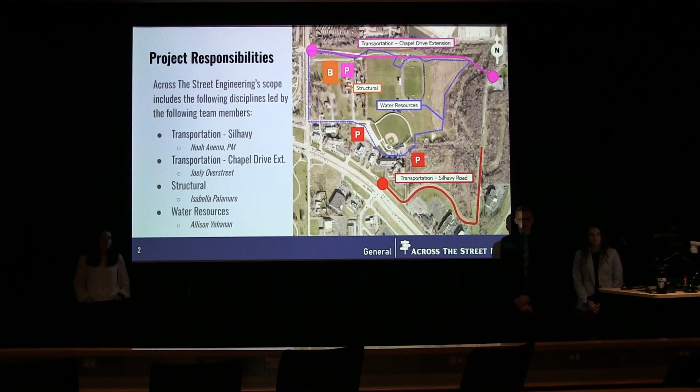During this presentation, we'll each take a turn to present the alternatives that we have looked at this semester, and we'll also present which ones we have selected. I'll kick things off by looking at transportation at Silhavy Road.

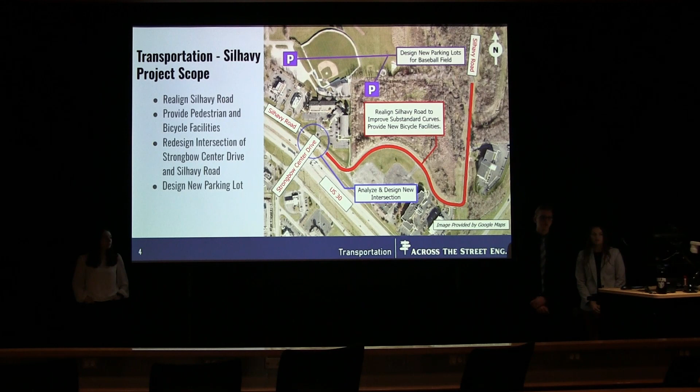As a recap from last presentation, I will be realigning Silhavy Road to improve substandard curves that currently exist. Along this alignment, I've been asked to provide facilities for pedestrian and bike travel. The city has also asked our team to redesign the intersection of Strongbow Center Drive and Silhavy Road. Finally, new and improved parking is needed for the VU baseball facilities.

The benefit of this alternative is it is the lowest cost both for construction and maintenance. It also has a very good level of service and low intersection delay. The disadvantage of this alternative is there are some safety concerns for pedestrians, especially crossing the northbound and southbound road.

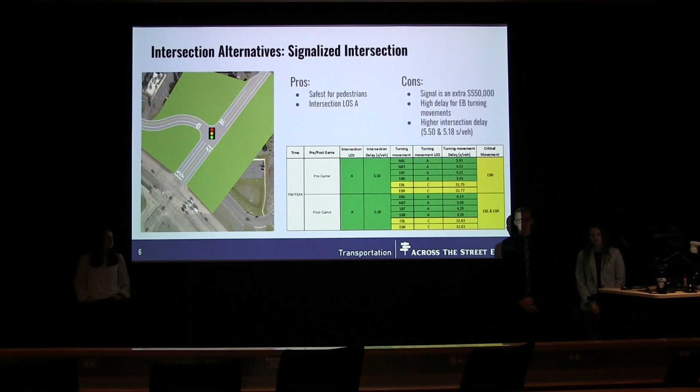The second alternative is a signalized intersection. This intersection will be safer for pedestrians, as a pedestrian phase can be included in the signal timing. It also has a good level of service, an A again. The disadvantage of the signal is it's an extra $550,000 approximately, and it does have a high delay for eastbound turning movements. While it does have a low intersection delay, it is higher than the other two alternatives.

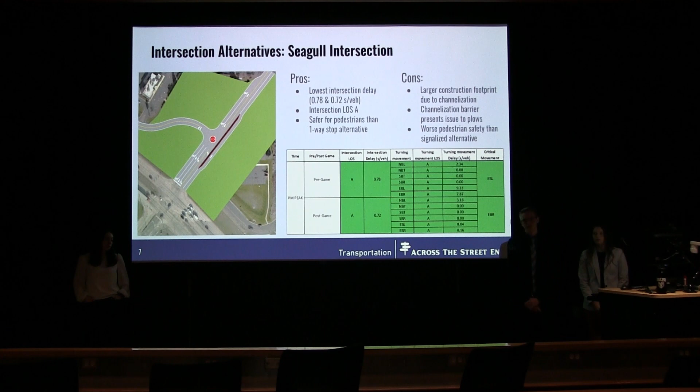The third alternative is a Seagull intersection. This intersection has the lowest intersection delay of all three alternatives. It is also safer for pedestrians than a one-way stop, since a pedestrian refuge can be constructed within the channelization barrier. The disadvantage of the barrier is that it will be a larger footprint and higher construction cost. There is also an issue with the potential for snowplows to run into it during the wintertime, which would be a higher maintenance cost.

I've selected the one-way stop as the preferred alternative. The reason for this decision was the low construction and maintenance cost, as well as low intersection delay.

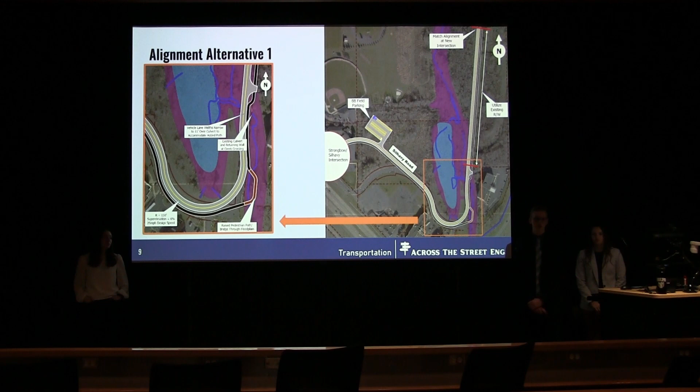This new design would have a 150-foot radius and 6% super elevation, and with those parameters, we can reach a design speed of 25 miles per hour.

This alternative is the cheapest alternative because it uses the footprint of the existing roadway as much as possible. It also has a low wetland and floodplain impact by avoiding the wetland, going around the south of it. Finally, it has direct access to the hotels and businesses that are already along Silhavy.

The disadvantage is it's not the most direct link between what will be the Chapel Drive extension up the top and the Strongbow Road, Silhavy intersection. And because we're going around the wetland with that tight curve, it's designed for 25 miles per hour instead of 30 miles per hour, which is what's desired by the city.

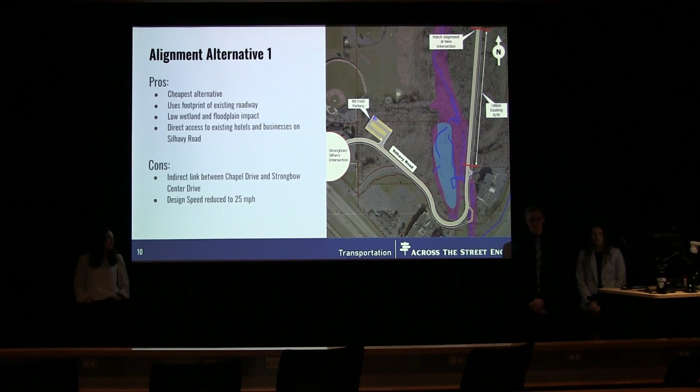Continuing to the southwest, we'll need a new intersection and a new roadway link, taking us down to the existing buildings and hotels.

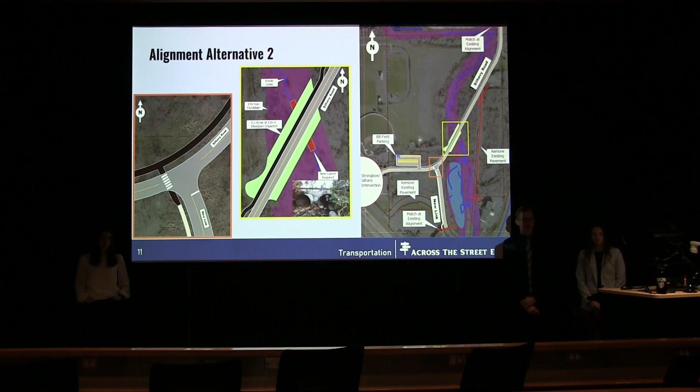The benefit of this alignment is it is the most direct, and it can be designed for the 30 mile per hour design speed. But it does have several disadvantages.

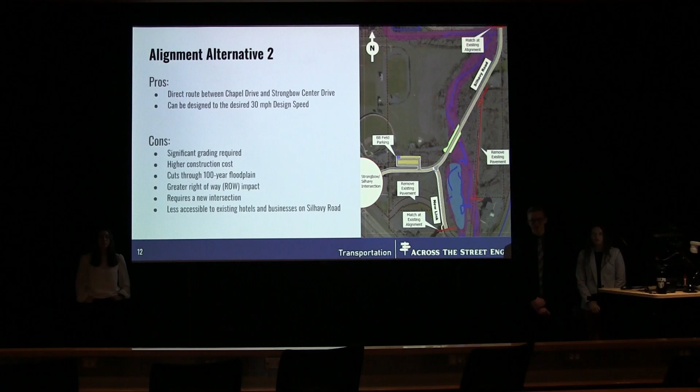There's significant grading and excavation that will be required. This leads to higher construction costs. It cuts through the 100-year floodplain, so mitigation will be needed for that. There's a greater right-of-way impact.

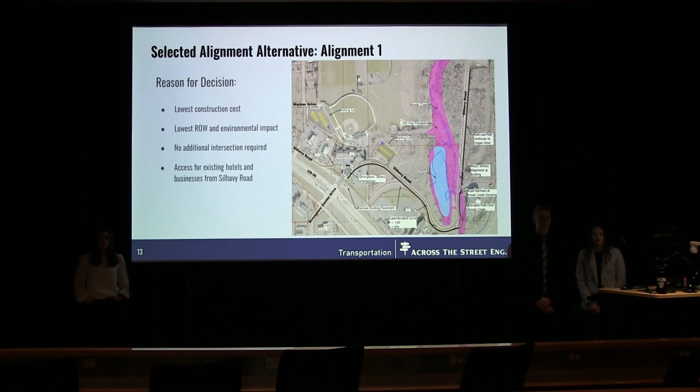I selected alternative 1. The reason for this decision was the low cost and the lowest right-of-way and environmental impact. In addition, no additional intersection would be required, and it is the most accessible for the hotels and businesses.

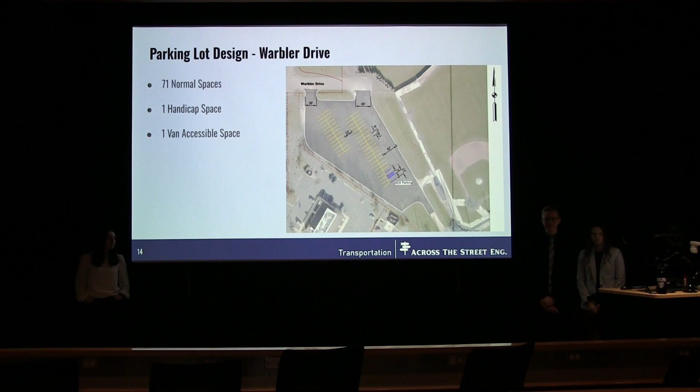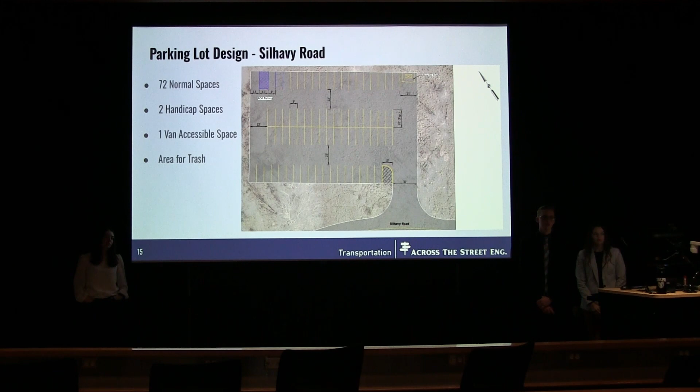I have designed the layout for 2 parking lots. This first one follows the footprint of the existing lot at Warbler Drive. The second parking lot is on Silhavy Road. I strategically located this lot on a flatter area to minimize grading and excavation, and I also located it south of the overhead utilities, so I'm avoiding those utilities as well.

I've estimated the construction cost for my preferred alternatives to be $1.8 million, with a 20% contingency that brings it up to $2.1 million. You can see some of the major components of the construction costs on this slide.

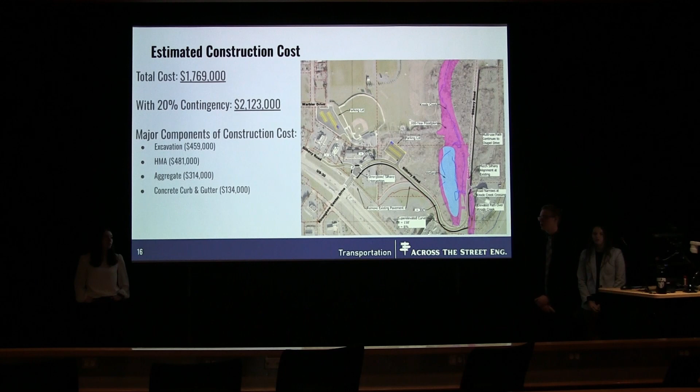I did use the INDOT standard pay item spreadsheet and the unit cost estimate method for calculating the construction cost. I looked at about 26 different items to calculate this cost, but those 4 are the top costs for this project. At this time, I'll turn things over to Jolie.

Hi everyone, my name is Jolie and I'm the other transportation engineer for the Eastgate Development Project, but I focus on the Chapel Drive extension portion of the project.

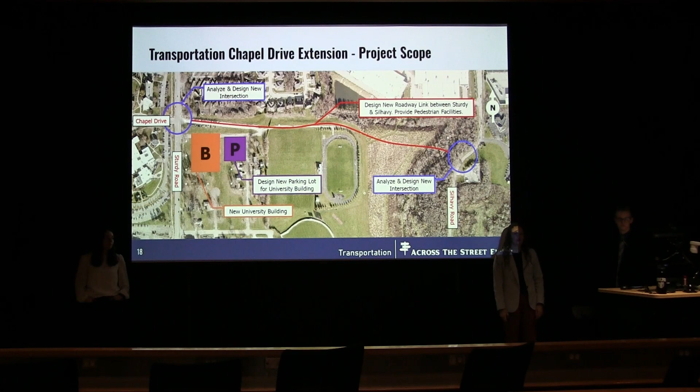So just a little refresher on my scope from last time. I was tasked to create a roadway link between Sturdy Road and Silhavy Road, and also redesign the intersections of Sturdy and Chapel Drive and Silhavy and Chapel Drive. Along with that, I designed a parking lot for the new academic building that our structural engineer Bella will be designing. So to start off, we'll take a look at my intersection alternatives for Sturdy Road.

So the first intersection alternative that I looked at was a roundabout alternative. The pros of this roundabout are that it has a level of service A and it has very low intersection delay, as well as low maintenance costs because you don't have to worry about a signal or anything.

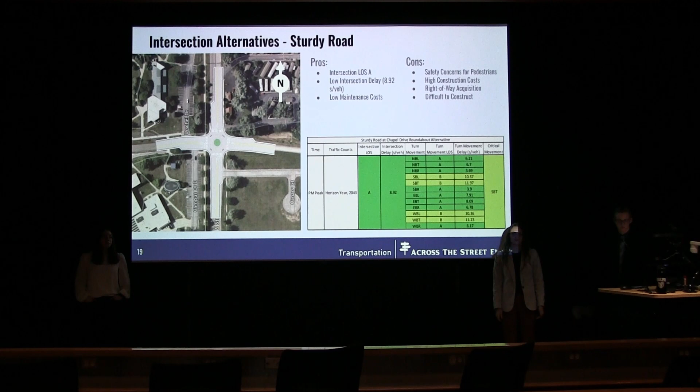However, the cons are that there are a lot of safety concerns for pedestrians. Construction costs are really high for the roundabout. You'd need to have a lot of right-of-way, and it's difficult to construct because of the geometry of roundabouts.

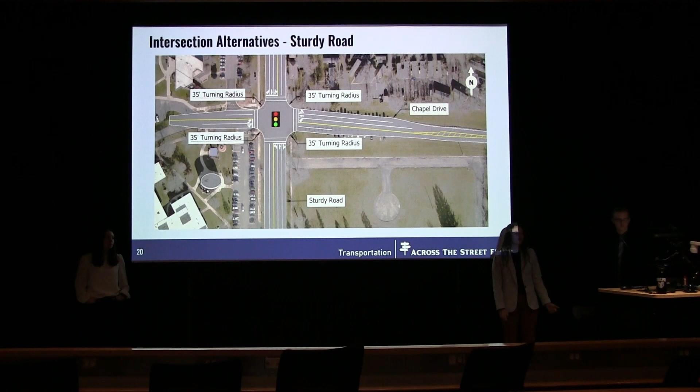The next alternative that I looked at was a signalized alternative, and this has 35-foot turning radii on all corners of the intersection. The pros of this intersection are that there is a level of service B, a low intersection delay, it's much safer for pedestrians, and the construction costs are lower.

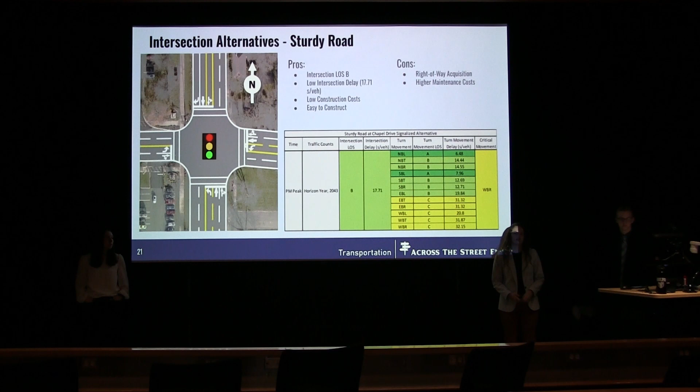However, some cons are that the maintenance costs are higher due to the signal, and you would still need to acquire some right-of-way. While we acknowledge that the roundabout had a better level of service, the difference in cost as well as the fact that the level of service difference wasn't really that much, we've selected the signalized alternative for the Sturdy Road and Chapel Drive intersection.

Looking at the Silhavy Road and Chapel Drive intersections, the first alternative that we looked at was a two-way stop, with stop-controlled movements on the eastbound and westbound approaches. The pros of this are that it has low construction and maintenance costs, as well as being very easy to construct. However, the cons are that during the PM peak, there is a level of service C, and during the AM peak, there's a level of service D, which is not ideal, and there is a much lower traffic capacity.

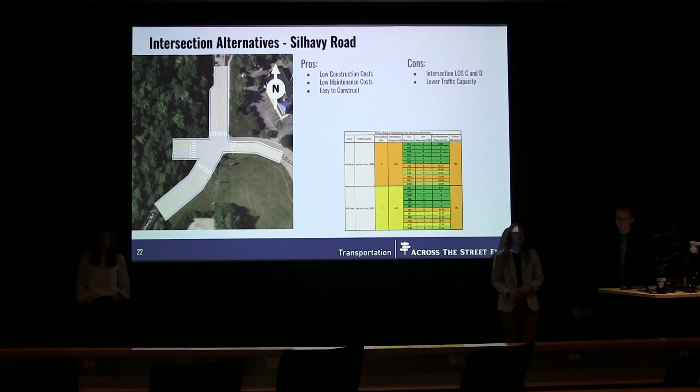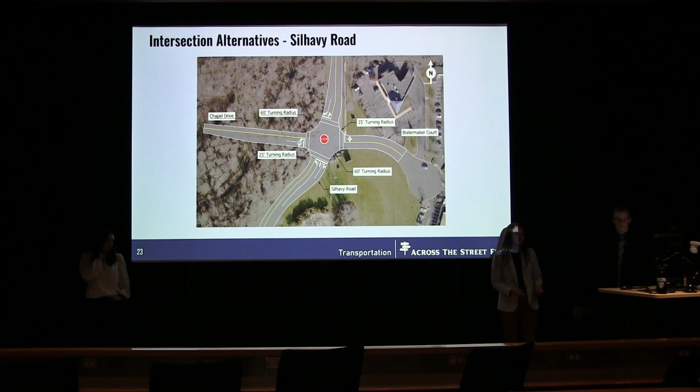The other alternative that we looked at was an all-way stop, shown here. The pros of that are very similar: there's low construction and maintenance costs, since all we need are some stop signs and pavement markings, and it's very easy to construct. It is an intersection level of service B, which is very improved from the other alternative. However, there is a higher total intersection delay than the two-way stop, because obviously everyone is stopping now and not just the two movements.

But ATS has selected the all-way stop approach as the preferred alternative for the Silhavy and Chapel Drive intersection.

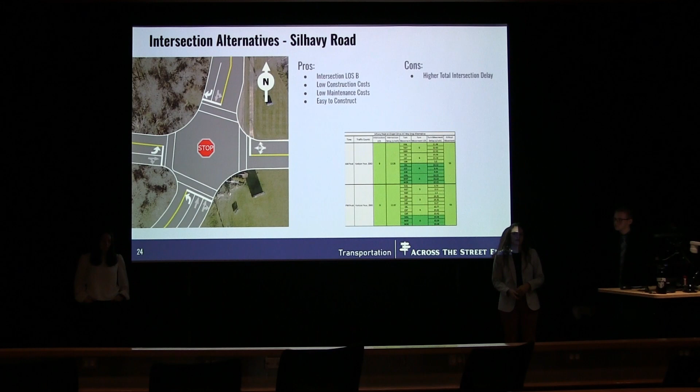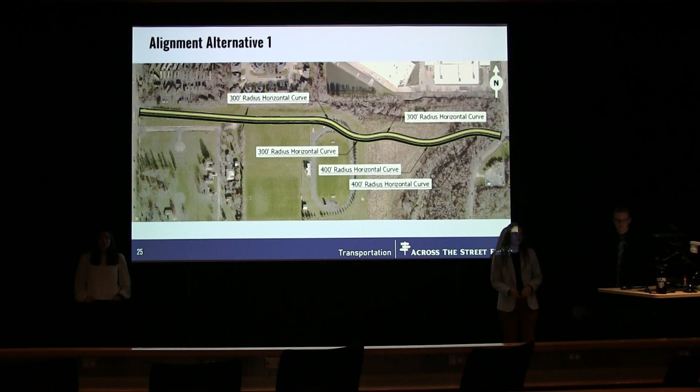Looking at the alignment alternatives, the first alignment alternative proposed is shown on the screen, and it has 5 horizontal curves, including one that goes through the wetlands area while crossing Node Creek. The second alignment alternative has 3 horizontal curves, however, there isn't one going over Node Creek.

Looking at the pros and cons of both alignments, there's limited wetland impacts for both, and they are both pretty direct as far as getting from point A to point B. However, alignment alternative 1 is going to have higher construction costs due to the curve crossing Node Creek, and there are also more horizontal curves requiring a larger footprint. For that reason, ATS has selected alignment alternative 2 as the preferred alternative for the Chapel Drive extension.

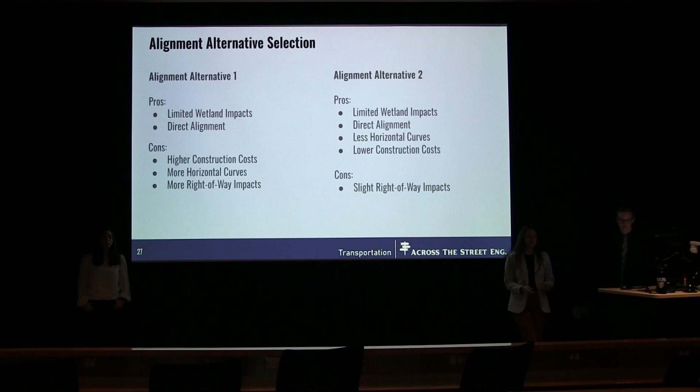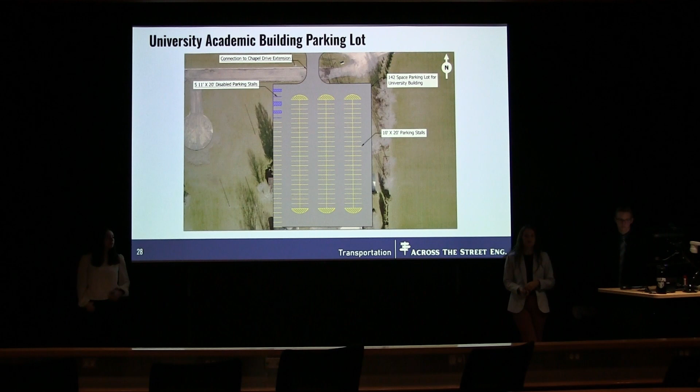Lastly, I was tasked with designing a parking lot for the academic building. This parking lot's design has not changed since our last presentation. It is still 142 spaces. However, there have been end cap pavement markings added to ensure that a WB50 truck would be able to have room to turn within the parking lot.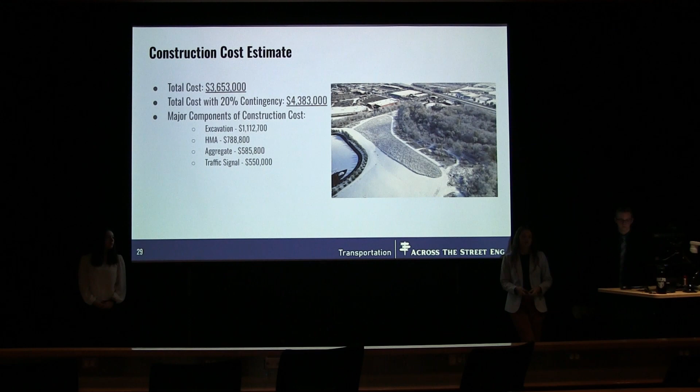Leading into the cost estimate, using the INDOT pay items list, I found that my total cost was about $3.6 million. When you add in the 20% contingency, it bumps up to about $4.4 million, with the most expensive parts of that construction cost estimate being the excavation, HMA, aggregate, and the traffic signal. With that, I will pass things over to our structural engineer, Bella Palmer.

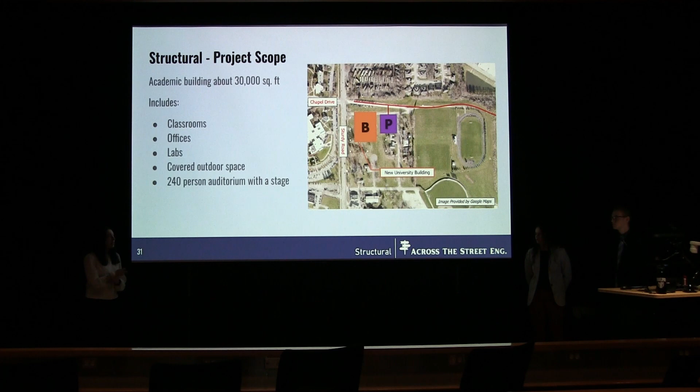Just to recap the structural project scope, I was tasked with designing an academic building on the Eastgate property that is about 30,000 square feet. That will include classrooms, offices, labs, a covered outdoor space, and a 240-person auditorium, as shown in the figure on the slide. So in order to satisfy the project scope, 3 alternatives have been evaluated.

So just to take a look at all of the criteria used to evaluate the buildings, I will evaluate construction cost, maintenance cost, feasibility, environmental impact, and space efficiency, and all of these factors as well as their weights will be discussed later within the presentation.

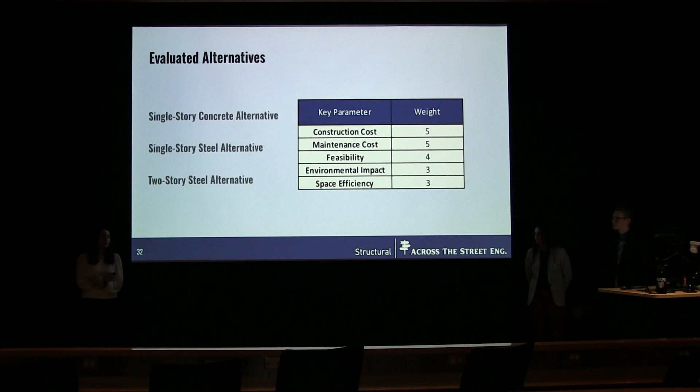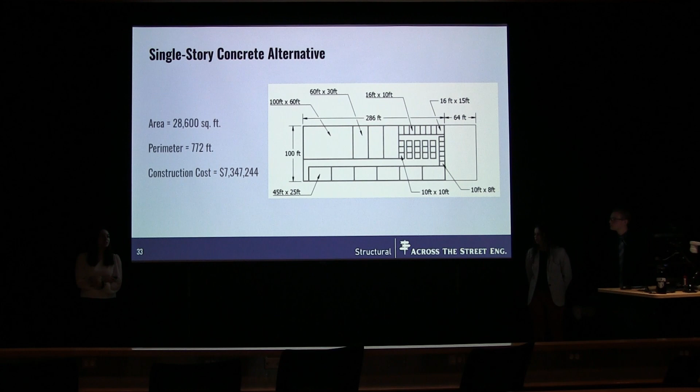To talk about the first alternative, the single-story concrete alternative, this alternative will be 28,600 square feet, and the perimeter will be 772 feet. The construction cost for this alternative will be a little bit over $7 million, and the floor plan is shown on the slide. This floor plan is the same floor plan from our previous presentation. The space allocated and everything has remained the same.

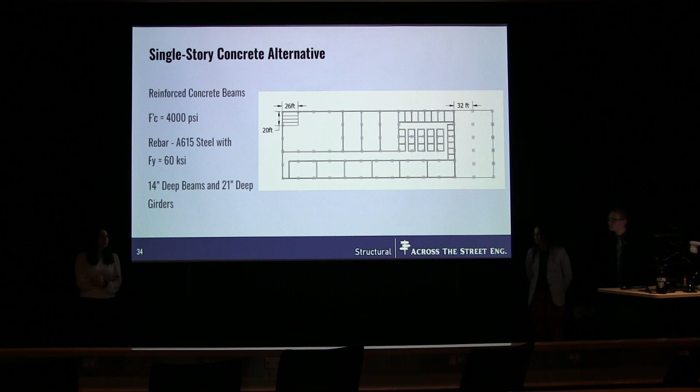For this alternative, we will use reinforced concrete beams with a strength of 4,000 psi because we will use normal weight concrete. These beams will also include rebar built with A615 steel, with a strength of 60 KSI. Using the length to depth ratios mentioned in the technical memo as well as the previous presentation, the beam depths will be 14 inches and the girder depths will be 21 inches.

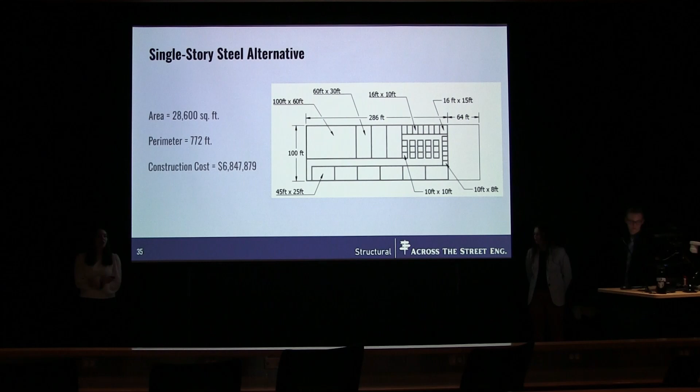For the single-story steel alternative, the area and the perimeter remain the same because the floor plan is identical for the single-story alternatives. However, the construction cost is significantly lower, being at less than $7 million. For this alternative, we will be using W beams, and the steel used is A992 steel with a strength of 50 KSI. Similar to the last alternative, the beam depths will be the same, using W14 beams for beams and then W21 girders.

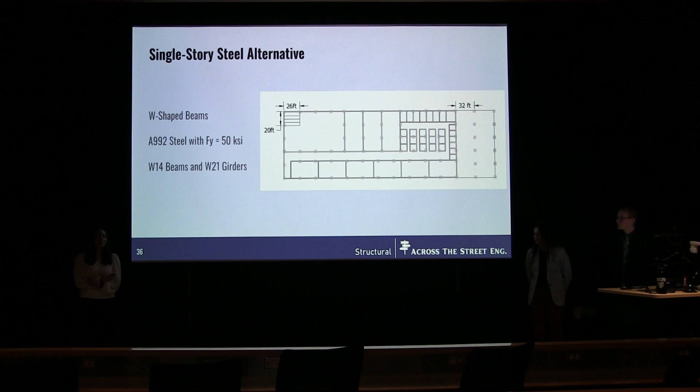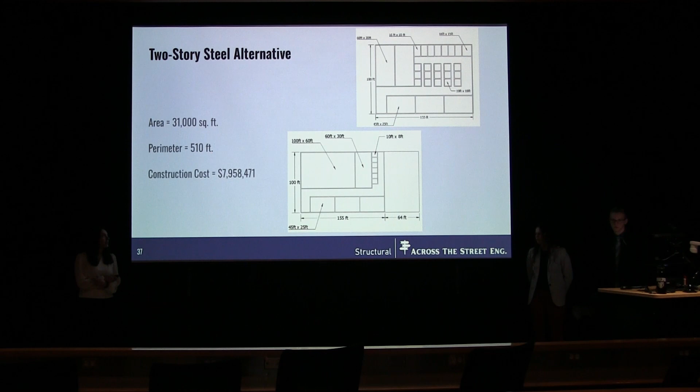For the two-story steel alternative, the total area of the building will be 31,000 square feet, which is slightly larger than the other alternatives. However, the perimeter will be less. Additionally, the cost will be significantly higher at almost $8 million. For this alternative, the same materials will be used as the single-story steel alternative. However, W16 beams will be used instead of W14.

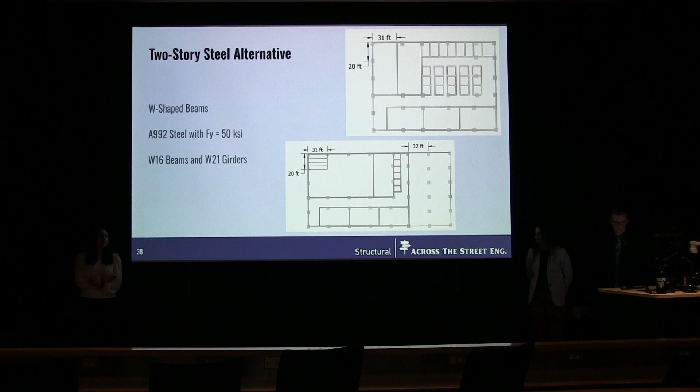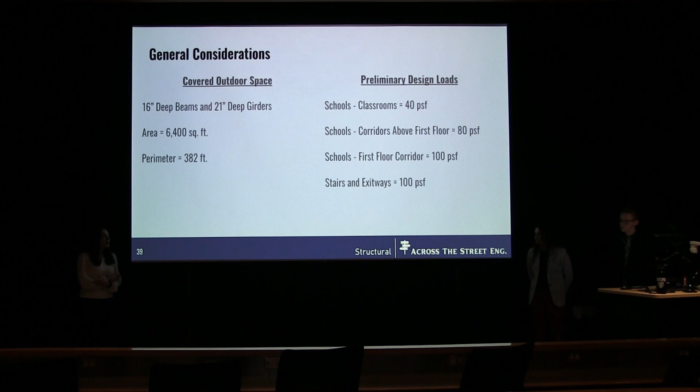In addition, some preliminary design loads were considered in the evaluation of each of the alternatives. Using design codes and standards, a few school loads were selected and used in evaluation.

Under construction cost, we considered excavation cost, material cost, labor cost, anything that would result in the construction of the building. For maintenance costs, the considerations were repairs, normal wear and tear, additional repairs if there were a natural disaster, and also consideration for an instance in which the occupancy of the building was changed at the desire of the client. Perhaps the classroom setting was not what the client wanted the building for, and they converted it into something for the athletic field or something along those lines.

For feasibility, we assessed the availability of each of the products and materials used for the alternatives, as well as the amount of labor that would be needed, and the time of construction.

For environmental impact, we evaluated carbon emissions, recyclability, waste management, and a few other things as well, but those were the main ones that really impacted which alternative was selected.

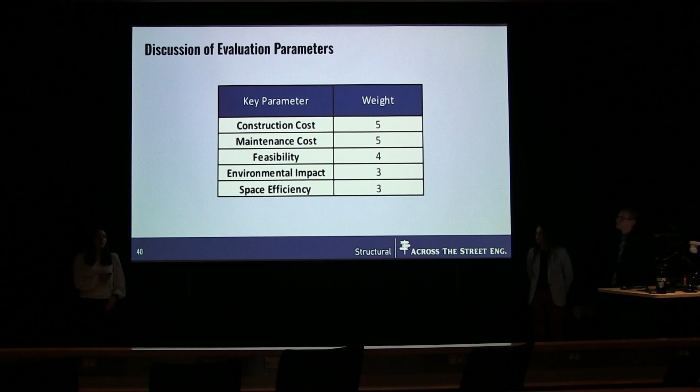So in an evaluation of all of the alternatives, it was concluded that the single-story steel alternative ranked higher than the rest in almost every category, tying with a few.

Some key notes: steel is a cheaper material than concrete, which is why the steel alternatives were slightly cheaper than the concrete alternative. Additionally, it's more expensive to implement 2 floors than 1 floor, which is why this alternative had the lowest cost. Steel is a slightly more environmentally friendly material than concrete, which is why that ranked higher in environmental impact. However, it did not rank the highest, as a timber alternative would have been significantly better than concrete and steel.

For maintenance costs, another notable difference was that steel tends to do better with rusting and weathering than concrete does, so the maintenance costs typically are lower for that, as well as maintenance costs for a single-story alternative are usually less than a two-story alternative.

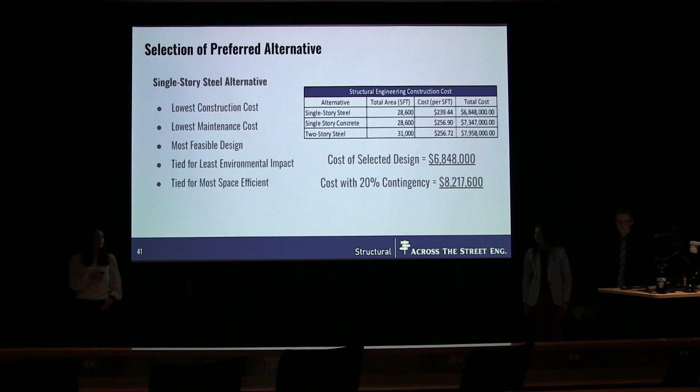So when evaluating our alternative, the construction cost of the single-story steel alternative was about $6.8 million. However, considering the 20% contingency, our alternative was slightly over $8 million. And now we will hear from Allison.

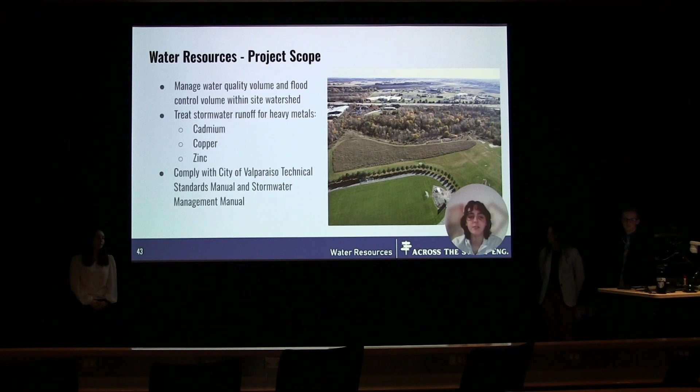As engineer for Across the Street Engineering, as a reminder, the project scope for the water resources portion is to manage water quality volume and flood control volume within the site watershed. It's also an owner preference to treat stormwater runoff for heavy metals, specifically cadmium, copper, and zinc. And of course, we're looking to comply with the City of Valparaiso Technical Standards Manual and the Stormwater Management Manual.

Since the last time we spoke, my watershed has changed slightly. If you recall, I had a quite large watershed originally, about 41 acres. I've now reduced it to a smaller watershed that's of more concern, which is pictured here. It's about 5.6 acres, and it is most concerned with the 35,000 square foot academic building, the 70,000 square foot parking lot, and not pictured is the 62,000 square feet for the Chapel Drive extension.

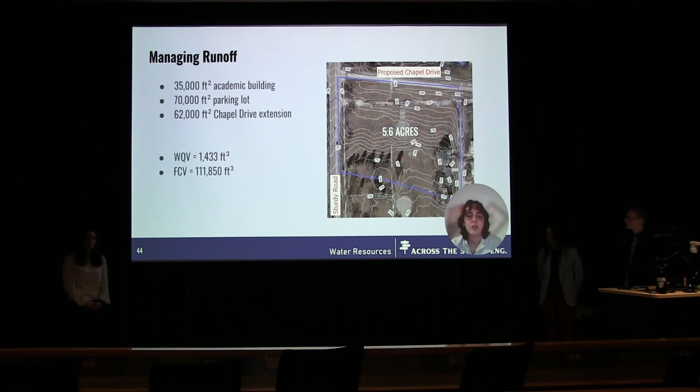And so with that, I have a new water quality volume and flood control volume. For water quality volume, I'm looking at 1,433 cubic feet. And for the flood control volume, I'm looking at a little under 112,000 cubic feet.

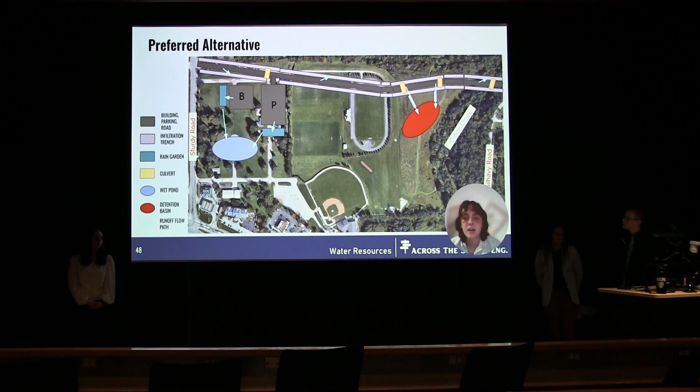Here's an overall schematic of the preferred alternatives. We have the proposed preferred alignment for the Chapel Drive extension, and running along that extension are infiltration trenches, with a few culverts. I have rain gardens neighboring the building and the parking lot, a wet pond just south of the building and parking lot, and a detention basin on the east side of the project for flood control.

For the construction cost estimate, I used the US EPA NPDES Stormwater Best Management Practice Standards and the Penn State Stormwater Project Cost Breakdown to estimate the construction cost. For the rain gardens, it's looking to be about $28,000. The infiltration trenches, $138,000.

The wet pond is looking to be about $108,000, and the detention basin, $155,000, for a grand total of $428,000. With a 20% contingency, that would put us at exactly $514,000. But of course, that is subject to change in the future. Thank you.

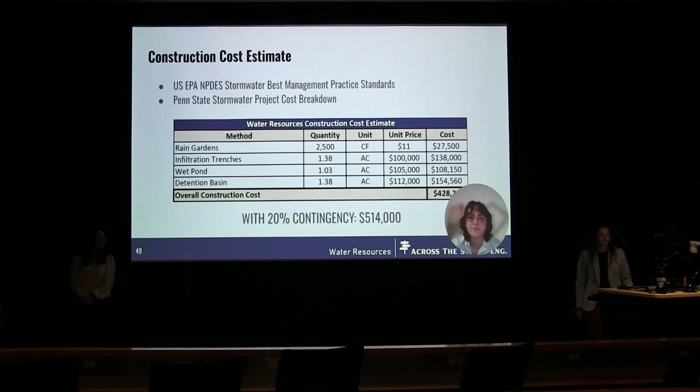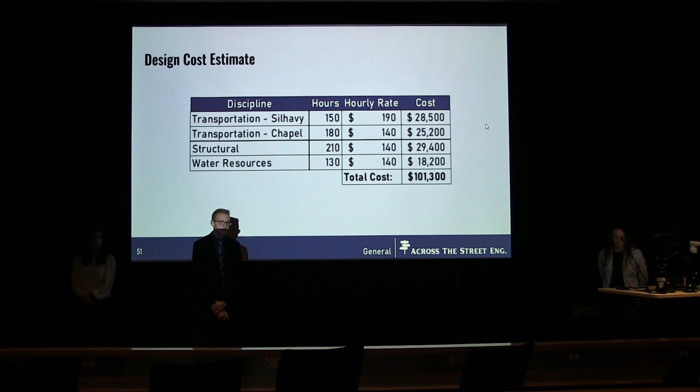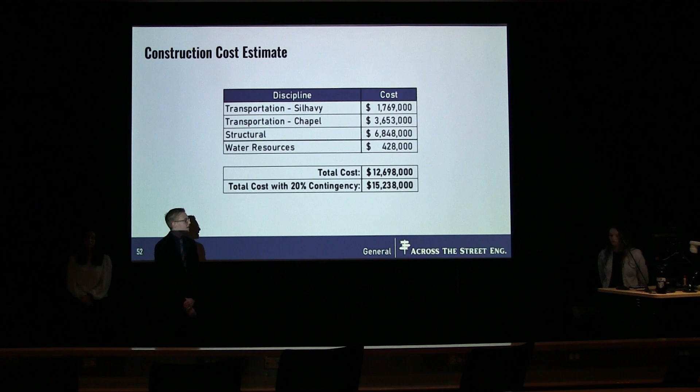So talking about costs, our design cost for this next semester will be $101,300, and construction costs, when summed from each of our individuals, will be a little over $12.6 million. With 20% contingency that comes out to $15.2 million. At this time, we're open for questions.

So on the transportation side, Joey, you have the stop sign over on Silhavy. What volume of traffic do you need, kind of east-west, to consider a stop sign versus not having any, or a four-way stop? I don't know if I'm being very clear in the question, but what is the difference between just having it be straight through and a two-way stop from the sides, and then a four-way stop?

Within the IDM, I didn't see anything as far as that you needed a certain number of counts, but since there are so many left turn and right turn movements coming from the eastbound approach, that was really what caused that high delay. People trying to turn out of Chapel Drive have to cross multiple lanes of traffic and make sure nobody's coming, and that's why a one-way stop ended up being better, since there were so many turning movements. But I didn't see anything as far as the counts specifically. Does that help answer your question?

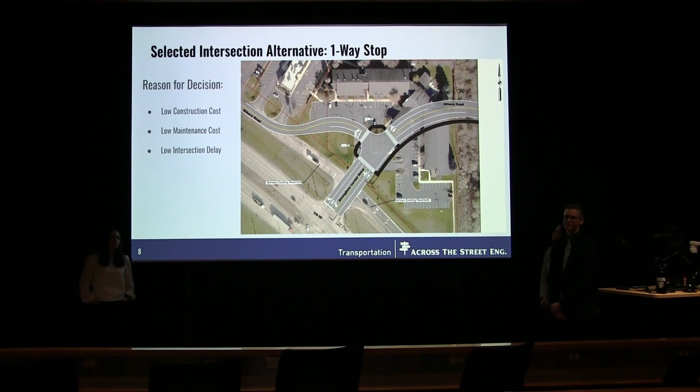Question for Noah. So talking about stops, you said a one-way stop was your preferred alternative? Yes. Could you go to the sketch or schematic? So it would be stopping on the eastbound approach, and the northbound and southbound approaches would just move freely, they would not have to stop. Okay, it seems like there would be so much traffic there you'd be waiting forever if you were to stop.

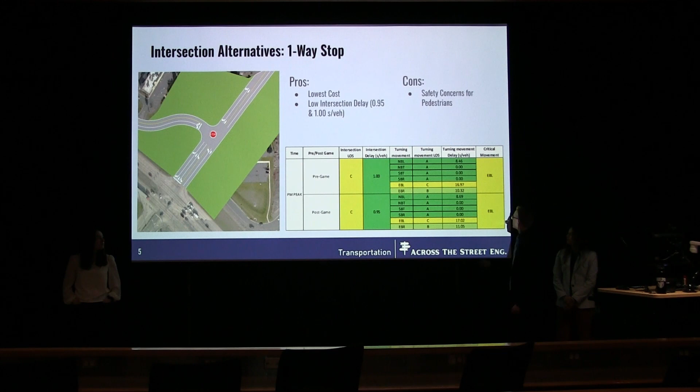And that's using peak volume traffic? So it's projected the PM peak, the peak hour, and it's projected 20 years into the future to account for growth. Okay, thanks.

On that, I know you did that big curve down there by the hotel, you said something about a 6% super elevation? Is that— the maximum allowed is 8%. I also talked to Professor Gross and my technical advisor, and 6% is okay. Okay, seems a bit much, especially in this region, because you get ice on there, you slide down. I don't know if you've ever driven on highways where you come to a curve and can't stay on the road because of super elevation. Okay, well if it's within standard, that's good.

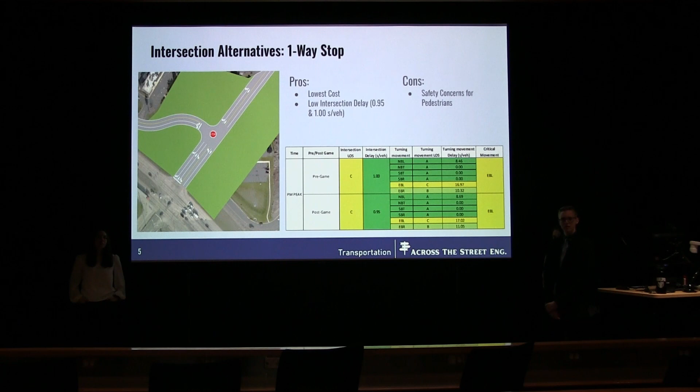So I had a question for Bella. You considered concrete and steel buildings? I'm just going from presentations in other years where they're talking about if there was a fire—I remember timber would last longer than steel, but what's the difference? It seems like there would be some safety differences there between if there was a big fire, would steel be less safe than concrete, or?

Right, so in that instance, I did consider that component of safety under my maintenance cost, because in evaluation, to me safety is designing a building that will be safe for all users and that will meet standards. So in doing so, I assessed that there are instances of disasters such as earthquakes, floods, and stuff like that. In an instance like that, the building would most likely, no matter which material we're using, require significant maintenance costs. So that's why I grouped those together.

As far as steel compared to concrete, steel is less fire resistant than concrete. So in an instance like that, steel would not outweigh concrete. But in other instances, such as weathering and stuff like that, which are more likely to occur than an extreme fire, steel did outweigh concrete. For this presentation, none of my alternatives were timber, so there was slight consideration when evaluating environmental impacts and material, but I did not take a deep dive into those since it wasn't an alternative listed—it had been ruled out previously. Okay, thanks.

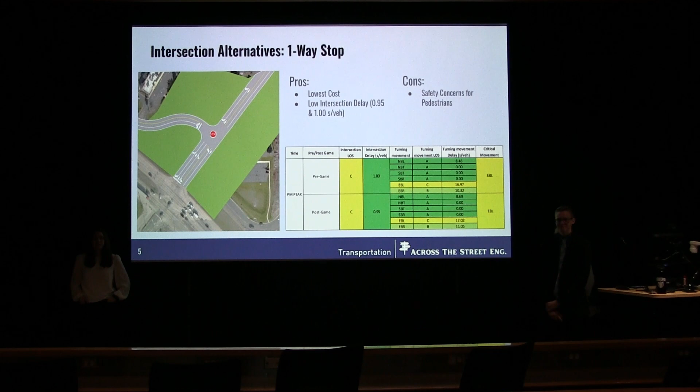And Allison's not available for questions? Okay. Any other questions? Okay, thanks.